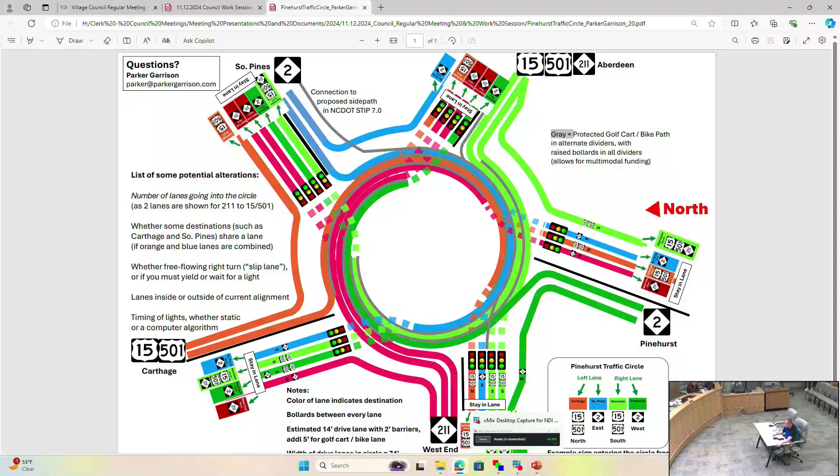Let's use the example of coming from Seven Lakes or West End, going to Aberdeen. The lanes will split off at some point before the circle. You'll have to stay in your lane throughout the entire circle, and there will be barriers in the appropriate place to enforce that. For simplicity, I didn't draw the gaps between the barriers when you're entering the circle, but there will be gaps in those places.

As I was talking with John, he even suggested maybe you could raise and lower the gaps for when the light turns green. That could be done as well, but that's not required.

Additionally, for multimodal access, there would be the opportunity to have a smaller lane to accommodate golf carts or bikes. I think the most common use would be connecting Route 2 to the opposite Route 2. I don't see many people trying to ride golf carts on the other three lanes into the circle, but having some connectivity there would be of use.

So let's say we're going from West End to Aberdeen. The lanes would ideally be painted to indicate clearly where you're going to your destination. So you would go to the light green lane to go to Aberdeen. You would have two options.

After talking with NCDOT at some of the other meetings, I added a second lane option illustrated here for the return trip from Aberdeen back to West End, seeing that that was not addressed by their current models. Traffic flow was backing up, particularly on both 15-501's entering the circle.

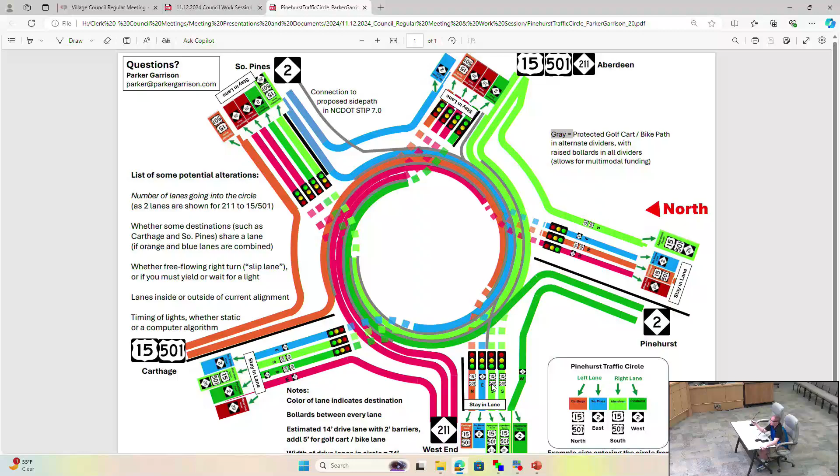Yes, the West End destination and the Aberdeen destination both have three lanes going to them. The merge for Aberdeen is shown here. The merge to West End was not shown on this map just due to space constraints. The lanes would split off at some point around Page Road or after that, so if you're coming from West End and entering the circle, it would become four lanes where there are now two, and only one of them actually goes in the circle anyways.

We talked a little bit yesterday about additional space that would be required to have these additional lanes. I think Parker was a little aggressive in some of the assumptions, but not necessarily, because you don't have to have absolutely all of these. The one thing that is true from the standpoint of a visitor: if you get in the wrong lane entering the traffic circle, you're not going to have an option to switch lanes.

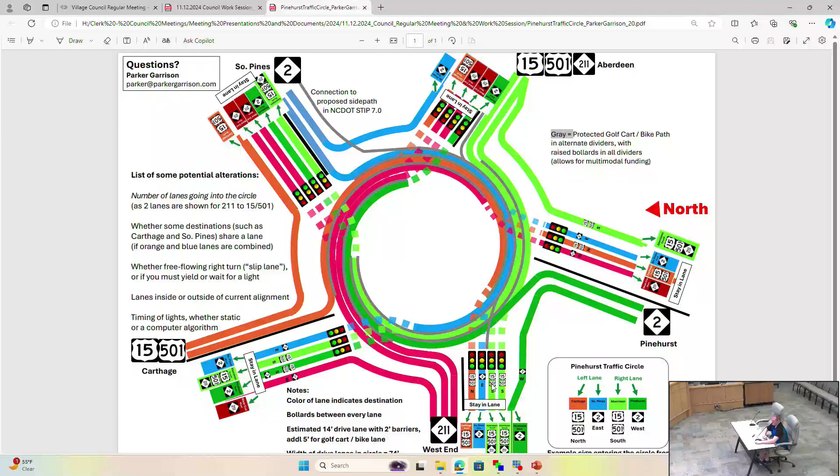So if you intended to go 15501 north but got in the lane for 15501 south, you're going to have to go south. It's basically like an interstate exit - we don't want people trying to switch lanes in a circle. By the way, that's not any different than if you pick the wrong exit lane on an interstate today. You may end up going south and having to go to the next exit and turn around. I think we've probably all done that at some point.

Yeah, and one of the other constraints I worked with was that we had to increase throughput through the circle beyond just right turns to more than one lane, because right now we're stuck not being able to go to two lanes in our current design without going to unsafe Jersey-style circles or confusing DC-style circles that have circles inside circles, controlled by two separate traffic lights, where you can't tell which light is for you. So, as you were mentioning, if we don't have the land to go to 4 lanes, maybe there's just one lane to 15501 south and one lane combining the orange and blue to 15501 north and 2 east. So you stay within the current footprint, but you still get 2 lanes going into the circle, and you double capacity through the circle.

Okay, two questions. How much of the circle are we taking away - do you have to carve out an acre of the 6.3 acres of trees, or what is it? What's your instinct tell you there?

My instinct says we'd be adding 2 to 3 lanes, each about 14 feet with 2-foot barriers, so we'd be adding about 60 to 70 feet. That probably won't take away from the circle at all on the side near Carthage - those 3 quadrants. It probably will take away from some trees on the side near Pinehurst Resort and Aberdeen. So we'd lose about 30 feet or so on that side.

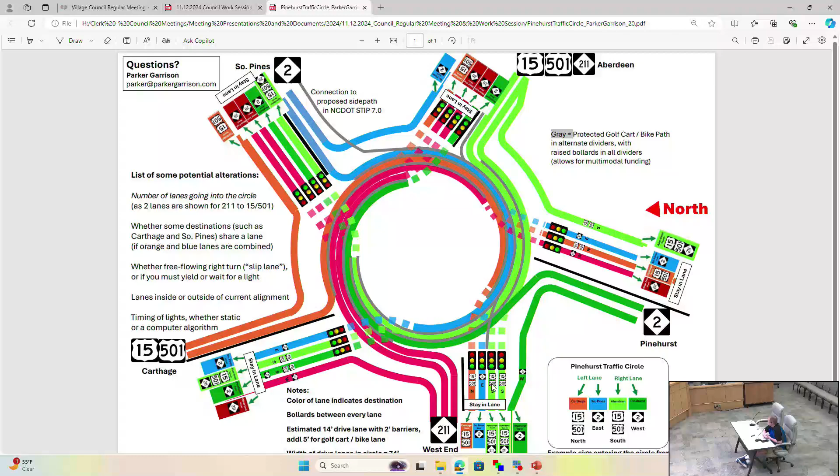Okay, so these traffic lights are independent for each lane, and they'd be sequenced somehow to allow certain directions into the circle while other lanes wait right next to them. Is that the idea? Yes, and you're already ahead of me.

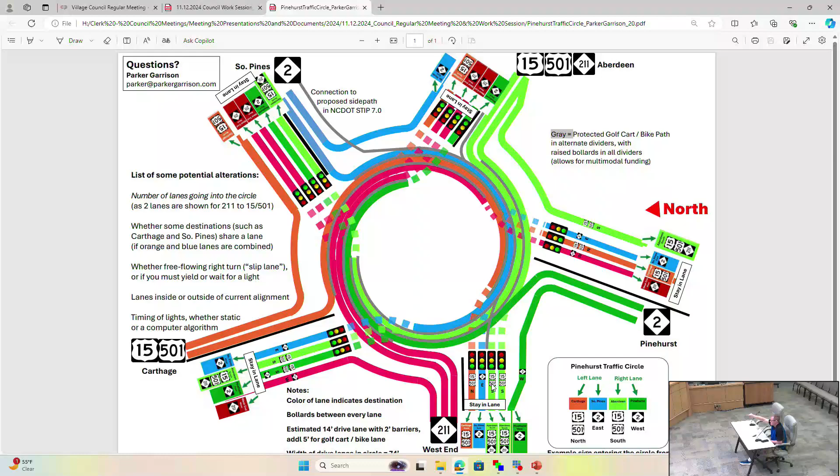No, good point. The simplest way to do it would be to have it sweep around in a counterclockwise direction, so there's no conflict with traffic already in the circle. So, for example, green from West End, green from Carthage, green from Southern Pines, green from Aberdeen, and then green from Pinehurst, and repeat the cycle.

But we can set up more complex arrangements. One I imagine will be particularly common, especially during evening rush, is: 15501 Aberdeen entrance to the circle allows all lanes except the dark green one to Pinehurst to be green. Southern Pines is red. Carthage allows traffic just to both West End and then to continue south on 15501 in the outer lane there. So you're able to get those 3 most heavily backed up directions of traffic to all move at the same time.

And let me say - go ahead. You have artificial intelligence recognizing how much traffic is coming in at certain times of day and adjusting the traffic via the lights, and also? Yes, there'd be the opportunity to dynamically adjust which lights are green and for how long. And in principle, it doesn't have to rotate - lights on opposite sides could change at the same time, depending.

Yes. Could you also describe for the other council members some of the conversations you've already had with people at DOT? Yes, so I was at the DOT's public engagement meetings in Pinehurst, and I communicated with their traffic engineer, Ruben, over email. He said he was going to take that concept and see if they could model it in their software, and I believe they would score it based off that. He said he hadn't seen any concept like this before, and he wanted to see how it performed in their models.

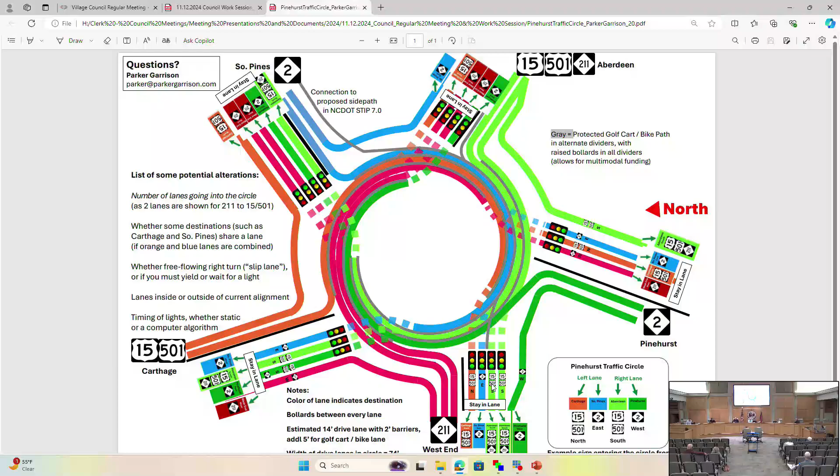So based on what I had spoken with Councilman Taylor about, we would not be using eminent domain on either the Pinehurst Resort section or on that section. But on each of these three sections, there would be the likelihood to acquire properties with all participants involved voluntarily. Two of the three, that's owned by Village of Pinehurst. That's owned by the medical clinic, and that one is likely this one here between Carthage and Southern Pines.

If we do not have the ability to buy any of those sectors of properties, there's always the opportunity to put the additional 2 or 3 lanes inside the circle. With how this area is probably going to be more lanes than the other, it would benefit us if we're able to purchase at least some of the property. If not, then we have to take away about 30 feet of trees on those sides, but it still maintains the 480-foot or so circle.

I think the setback where Pinehurst Trace is, there aren't any homes built right there, so it is at least conceivable, without having mapped it out, that it doesn't impose on PGA Boulevard or Dalrymple Road. No. Okay, thank you. So the commercial area along PNC Bank is a question mark.

I think the corner between Midland, 211 and Midland Road, I believe the lot closest to the circle is actually owned by the village, so there's at least room for a conversation there. But my guesstimate is that there are no homes that would be involved. There certainly would need to be some acquisition of land beyond possibly the existing right-of-way.

Can't move it. Shannon, can you provide any technical advice here? Too far away? Holding it upside down. Wait, it was upside down. Oh, that would do it. Oh, Peter, you had the mouse upside down? Thank you. Is that a keyboard? Sorry, guys. Bless you. Here goes. No, it's gone. I like the guy at the top who's pointed the wrong way. He's in trouble. I see the mouse, but it's not responding. It could be the mouse fan. There it is. Okay, you go. We're in business. Thank you, Doug.

Okay, buttons on the bottom here for, how do I advance it to the next slide? Down the lower left, there's a forward arrow button. I see it, right there. All right, finally, we get to go.

The objectives - I hate people who read for you, but these are our objectives. Find traffic circle improvements that improve flow and safety while maintaining the special nature of the circle and Midland Road. Maintain to the extent possible the circular character, trees, and streetscape of the Midland Road iconic entry to Pinehurst. Find solutions implementable in a reasonable time frame and less expensive than wholesale rebuild and destruction of the circle. Minimize the above-grade structures which are inconsistent with the historic environment, and minimize or require no additional property acquisition.

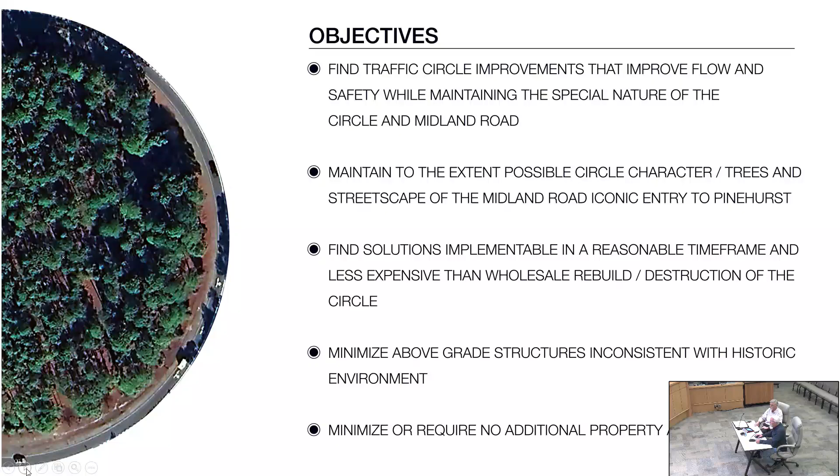I'd just like to add one thing. NCDOT kind of gave us a mandate that peak hour throughput should be 6,000 vehicles per hour. That's in 2050, that's what they're looking at, and that's based on their 80,000 vehicles estimate. Really, the 80,000 vehicles is not an issue as much as peak hour demand. So we have 1.5 hours during the day that really clogs everything up.

So we're going to show you today 3 schemes. The first one we're calling the true continuous flow, and we'll talk about that one first.

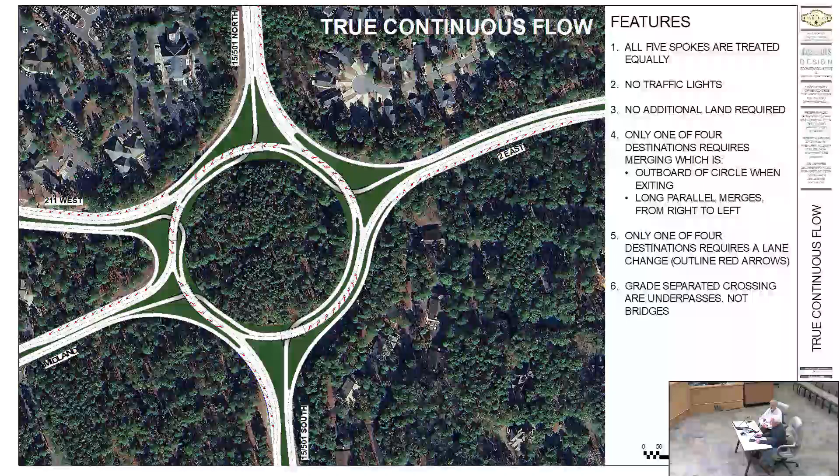This is a quick layout. This particular solution addresses all 5 spokes. They're all treated equally. There are no traffic lights and no additional land is required. Only one of 4 destinations requires merging, which is outboard of the circle when exiting, and it's a long parallel merge from right to left. Only one of 4 destinations requires a lane change, outlined in red arrows - I'll show you where those are. And there are some grade-separated crossings, but they are underpasses, not bridges.

So to show you how these work, here's a color-coded solution addressing just one of the spokes, keeping in mind that all 5 spokes are treated equally. In this example, we're coming north on 15-501. Pause for a minute - north is up. 211 west is on the left side, right here. 2 East is on the right side. 15-501 north and 15-501 south, with Midland going to the club on this quadrant here.

So first, let's be the yellow car, and we're on our way to 2 East. We would be in the right-hand lane. We would follow the yellow road until we get to about here, where we would have to merge to the left - a long parallel merge from right to left.

Questions? Next will be the blue car.

The blue car wants to go from 15501 south straight to 15501 north. We would start in the left-hand lane, travel north, and go down a ramp to be an underpass going under the traffic circle, while the traffic circle would be above you.

So would there be a height limitation on vehicles that could go under there? There would be, and what that is, is debatable. Peter will show you some schemes which have a shallower solution because his scheme has alternative solutions for trucks. In this case, this would have to accommodate trucks.

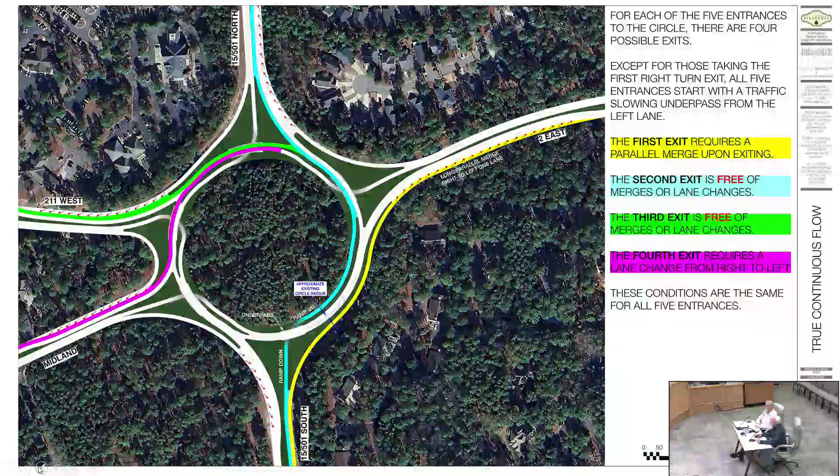15501 south — see on the next slide, Pat. So we've essentially answered your question for all 5 spokes. I'm not going to go through all of these, but this one is the one we just talked about from 15501 south. As you can guess, the other 4 work the same way from each of the 5 spokes. They're all treated equally.

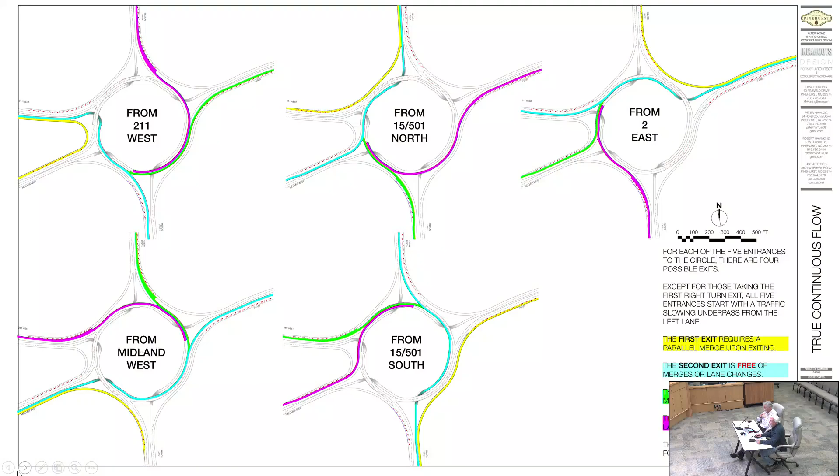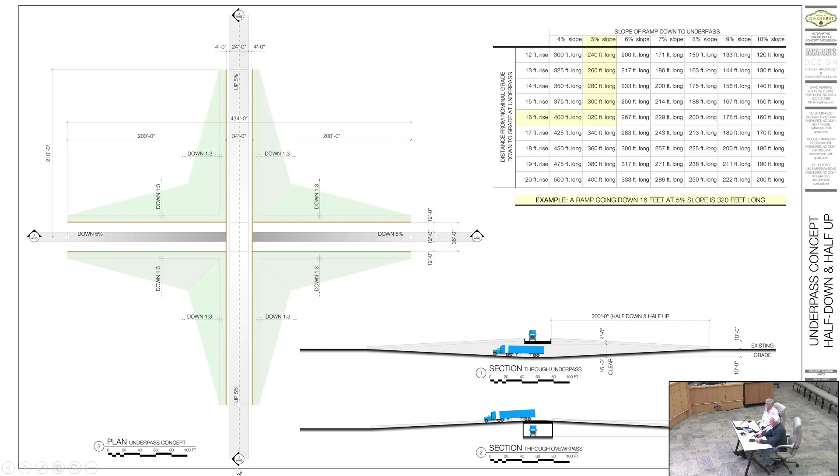There's a matrix up here for anyone who wants to get into the weeds, showing ramp slopes and ramp distances. In this case, there's the challenge of going under and then up to go over, so the distance from bridge to bridge becomes critical. This matrix addresses how steep the ramp must be. Keep in mind the underlying base grade of the circle is unknown, so we don't know how far up the upper part can be. By adjusting the distance between bridges and their vertical and horizontal locations, the ramp length and clearance can be affected.

Question: I understood the green car going on 15501 from south to north, but why is there now a gray part coming down from 15501 north into the circle? I didn't see that on the earlier slide. Clarifying: the gray underneath the green and purple are underpasses, for 15501 coming south into the traffic circle. Using the blue car as an example: coming from the north down the blue road, you go under right there. The blue car eventually goes around and could exit at 2, or change lanes to green or purple. But going straight from north to south on 15501, you come down blue, go around, hang a right, get on green, and continue south, with no lane changes or merges.

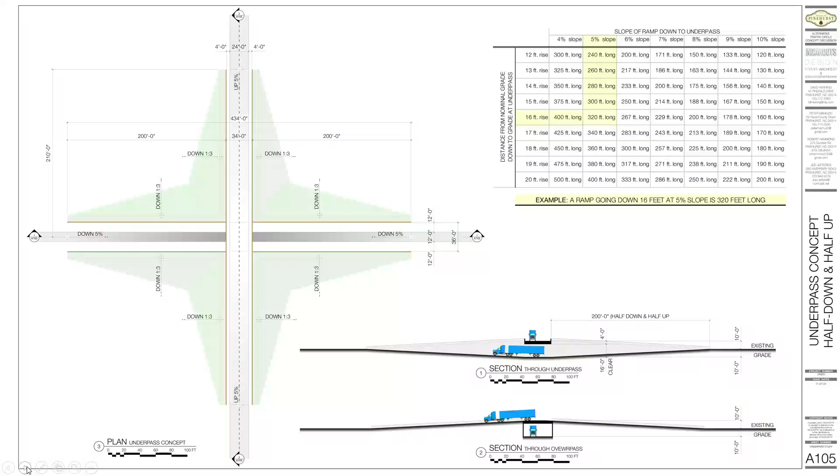The only limitation it has is it's only for cars. I've kind of arbitrarily decided on an 8-foot ceiling on this underpass with a 4-foot support structure to support the circle up above. That makes it 12 feet under the circle ground level.

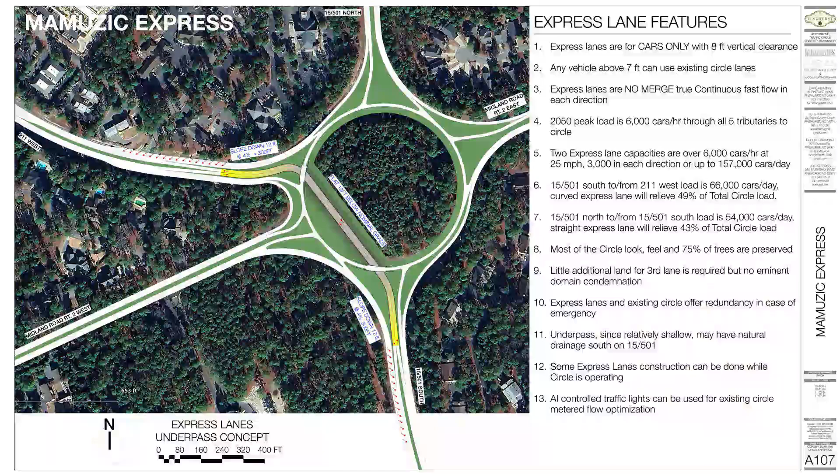Can I jump in real quick? If you recall, DOT, when they originally gave us two options 2.5 years ago, this is very similar to the second option. They actually had it as a flyover and not a tunnel underneath, but same basic concept of removing that leg and the largest amount of traffic out of the actual circle, and that would free up the circle to move more smoothly.

And you lose some trees without any question, but not a lot, because you can build this with retaining walls. You don't need the 3-to-1 slope, so you only need, call it 25 feet. Well, I'd figure 30 feet. With the 2 lanes with a 2-foot separation, it's 32 feet down at the bottom. With 15-degree up, it'll be 38 feet at the top. So out of a 600-foot circle, of which about 550 feet are trees...

I was going to mention the same thing Doug just commented on. This is very, very similar to the flyover concept, and I don't know specifically why they chose a flyover, but my guess would be that there's a deal with water. Whenever you start digging in this area and you get low, water management becomes an issue. The engineer is going to have to take a look at this and say, are we going to be at periods of time in which you're basically expected to drive through rivers here when you go down. When you go up, you don't have that issue.

One of the reasons why we kept it to an 8-foot clearance is not to go 20 feet deep. We're only going 12 feet deep, and if you go down 15/501 to the neighborhood down the street, and I shot it with my laser, which is not very accurate, but you can actually drain the circle, or drain the 8-foot depth, down the hill on 15/501. So water would not be as much of an issue. If we go 20 feet deep, you're right, we would have a river down there.

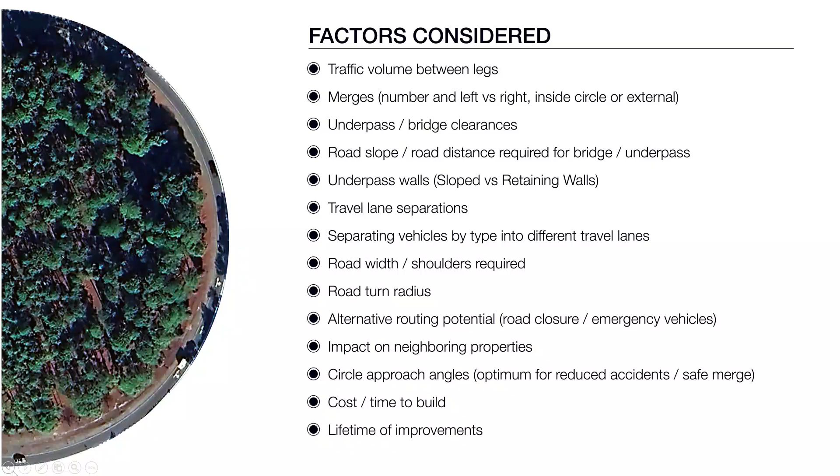So we have the true continuous flow, then we have the Mamuzic Express, or we could call it the fly under, and the straight through - I mean, straight through.

Here, I'll go to the front. And the last one is the straight through express.

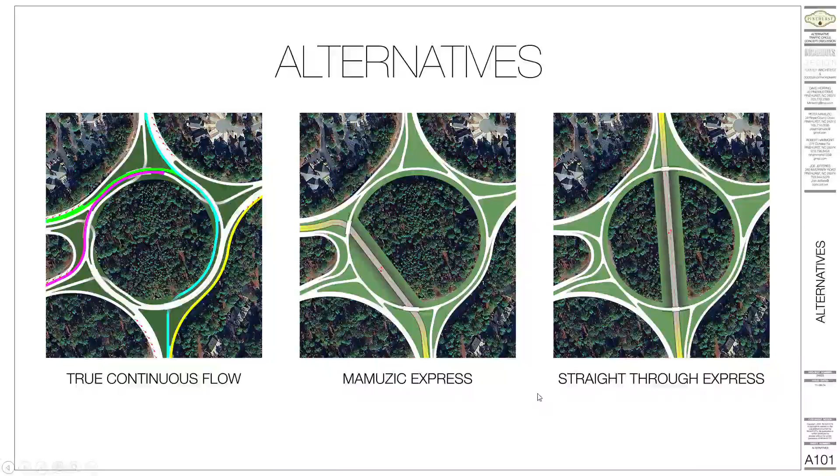Here are the three options again. I'm impressed, to say the least, that people took the time and made a serious proposal.

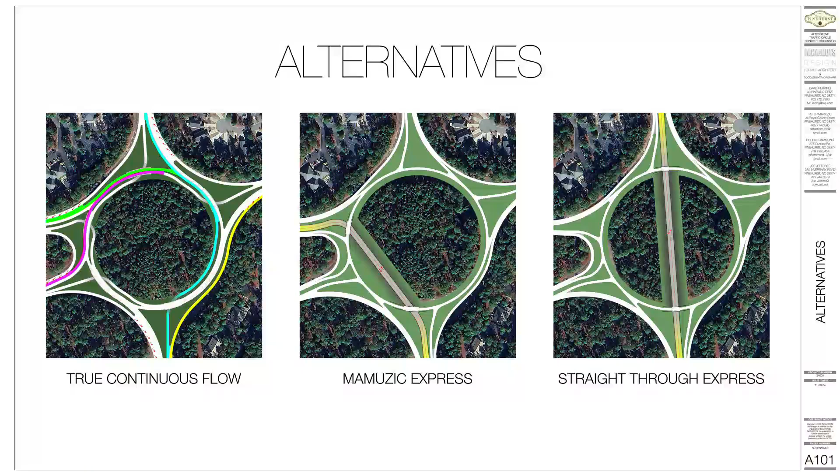I'd like to ask Parker, do you have any observations after watching these two geniuses at work?

Regarding option 2, the reason NCDOT studied a flyover only is that NCDOT does not allow new structures to be built with less than a 14-foot clearance, or 16-foot for interstate highways. So that would need a much longer approach and much further digging down if you were to do the second option you proposed.

NCDOT has also studied option 3 already. They found it was insufficient because of the traffic going on 211 to 15/501 south on that segment. They found we would need 2 tunnels essentially if we were to do those straight-through tunnels, and that we'd need longer approaches. Basically, 2 or 3 were not sufficient on their own. You'd have to study something that combined both.

The question I'd have back to them is, the straight express would remove some amount of cars from the circle, whatever that number is, which changes the traffic flow around the circle. It doesn't remove as many as the 211 fly under. So that's a bit of the trade-off: are we going to get to the perfect capacity number, or do we factor in something else? But that's a good point, thank you for that, Parker.

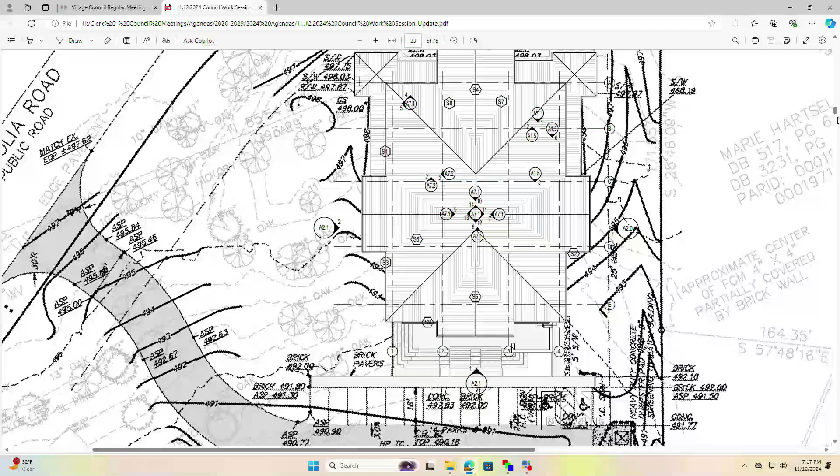Let's keep scrolling through this so we can see the rear view particularly. So there's not elevations included in these. We can go through it page by page, but—I don't need page by page, I just want to get a look at particularly the rear.

Is there a lift? I believe I saw a lift there when I looked at it online. Yeah, so yeah, there is a lift. I believe that's this right here. And how many steps are there?

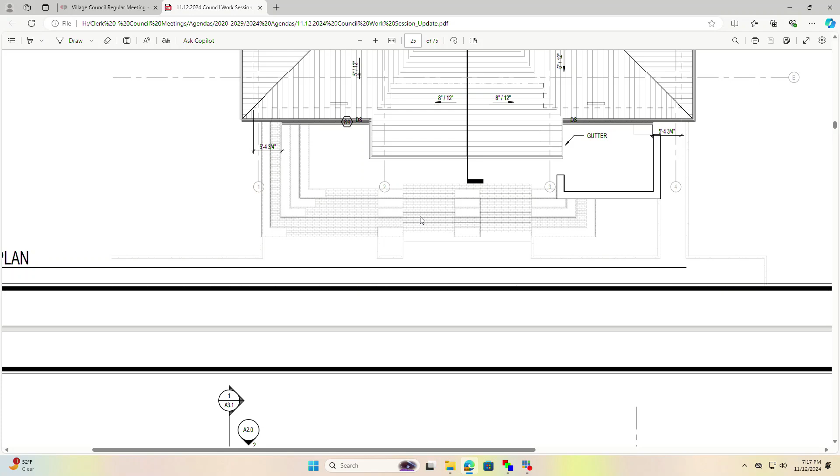Looks like 6. Or actually, these would be the steps. So looks more like 12. Probably double that. That's a lot of steps. That's a lot of steps for someone who parked their car.

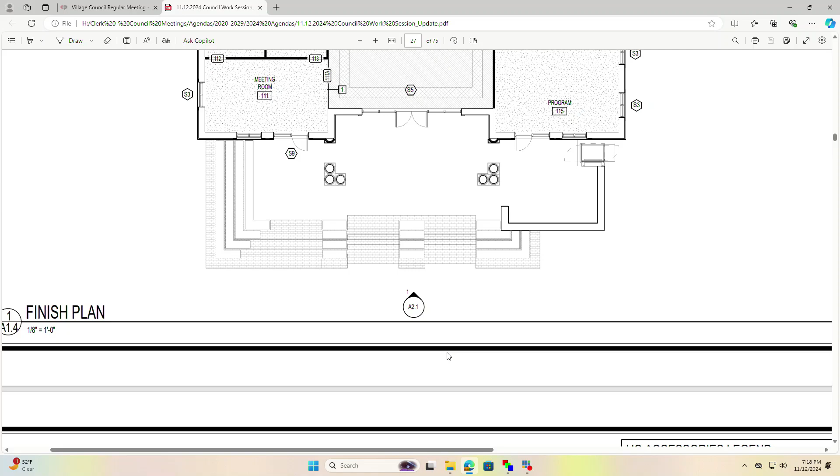I agree that we should not put this out and ask for responses in the month of December. Do we gain or lose anything by putting the information out, even if we don't ask for a response until January? We'll put it out as soon as we can, we just won't have the bids due until after the new year. Yes, please, put it out as soon as we can, and make it out there for a longer period of time.

No, that's inside. As I recall, the base of the back stairs, the elevator, or lift, whatever it's called, for handicap access, the base of that is the same grade as the handicap spots in the parking lot. Is that correct? Yeah, okay.

So there will be handicap access at the back door through the lift, but if there's a way to potentially put in a meandering trail along the side of the building so that a mom with a stroller could potentially go in the front door, I think that might be a nice touch if possible. And if it's not possible, then what are we leaving the disabled community with here? So they could either enter through the front door or using the lift in the back.

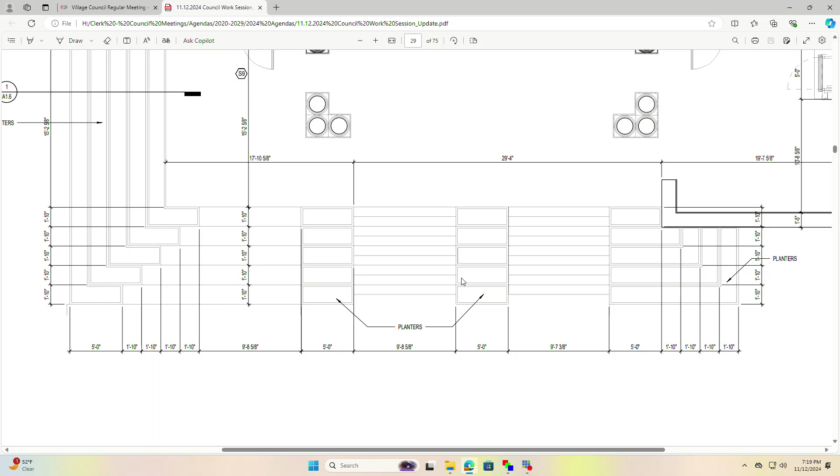Well, I'm missing something then. What's the difference then? Why can't they use the front door if they're going to use it anyway? Is there front door access? So currently the front door is only a drop-off, so there wouldn't be a place to park and enter through the front door.

So the drop-off, though, if you have a disabled individual, the driver's getting out of the car also. So it's not really a drop-off, but there's got to be a spot for the car to stop to help assist the person getting into the building. Okay, so we can also have handicap parking in front of the building, but based on our discussion in the past, we removed that handicap parking in the front.

Let me go back to the grading back here, the 12 steps. Is the reason they can't make it more accessible because they run out of land in the back? Or if they had another 15 yards of land, could they make it fewer steps and a ramp? That's what I don't understand about what they're making.

The reason why is that coming off the road, it's relatively flat, but once you get 100 or so feet in, it starts to go down, and the parking lot is at a lower level than the actual building.

Well, is there a drawing of the rear? I'm trying to understand, is there shrubbery or whatever's back there that indicates the end of the library lot? Is there such a drawing? There's not. The ones included here were only the building layout, the construction drawings for the library.

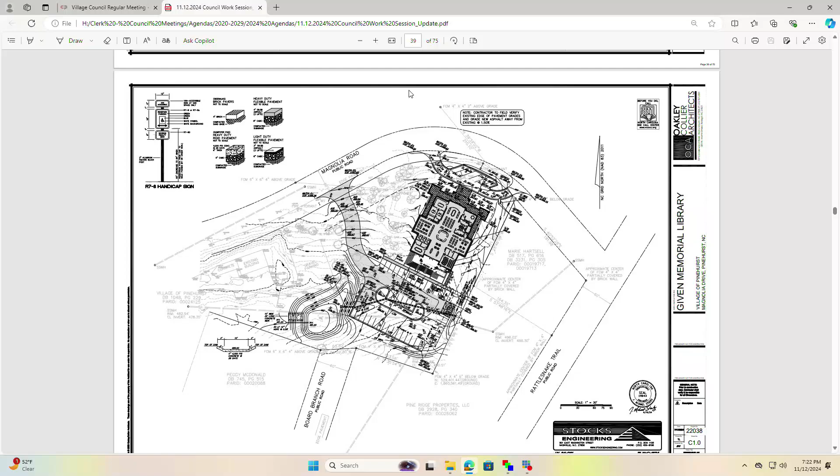It's much better served through effectively an elevator, which they're calling a lift. So you pull in and you elevate up through there mechanically, and you go from there.

If council wanted to address handicap access to the building as much as possible, we could do a potential trail along the side here and enter up at the porch or the front entrance, or at this drop-off, which won't include the angled parking, but we could do a parallel handicap spot there if we wanted to.

I think it's a mistake to have vehicles parked in front of a building that we spent all this time trying to make look nice. Yeah, I mean, that would be the only other option to make it easily accessible.

Is there enough space coming up what from this perspective is the left side of the building, all the way from the lot to the front? Yeah, that's what I asked them. I believe there would be. I mean, that's pretty far.

And even if it's not the specific 12-to-1 ratio, it would hopefully be long enough that anyone, a mom with a stroller, would be able to do it even without that. It could be 10-to-1 and it'd still be okay.

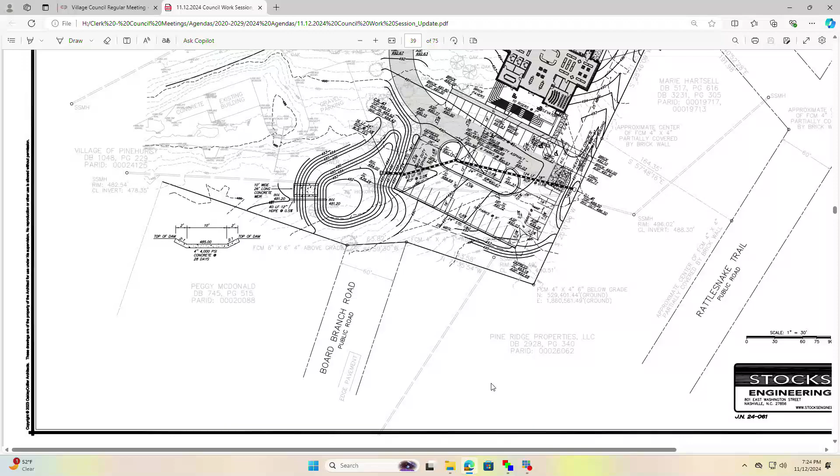Do we own the land to the right of this? Do we own the land behind there? No, there's a home. So we are boxed into these property lines. Yep, there's a home back there, it's my recollection. But what's the difference between the parking there and the next property line? Is that 50 feet, or can you tell?

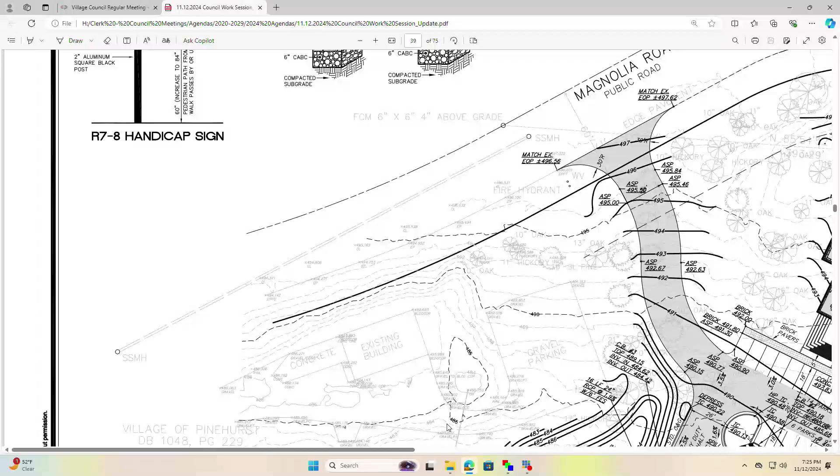So, right, we've got all these parking spots back here. Yeah, shift it a little over to the other side now. Go ahead up a little, there we go. So that's where it stops, the parking right there, and we've got this amount of space.

I'm assuming that's something like 10 or 15 feet. I don't know what the setback would be, but this parking space is 18 feet deep, so it's probably about 15 from the parking, which I think is our setback, so I don't think we can get any closer. It just looks deeper in the back than the 18 feet. Oh, here, yes, a little bit. That's where I'm getting at.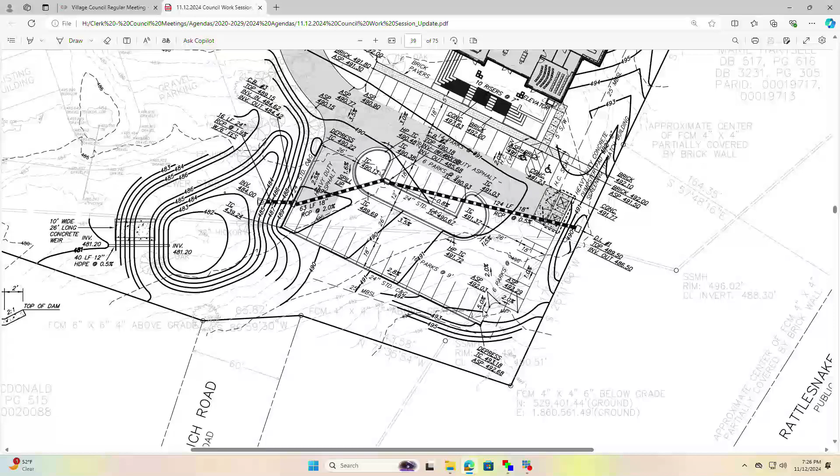Are the concentric circles in the lower area some sort of drainage, or is that just topography? That would be storm drainage, like a retention.

Does anyone recall the number of parking spots we're going to have? I know we went through this. 46, 48, something like that.

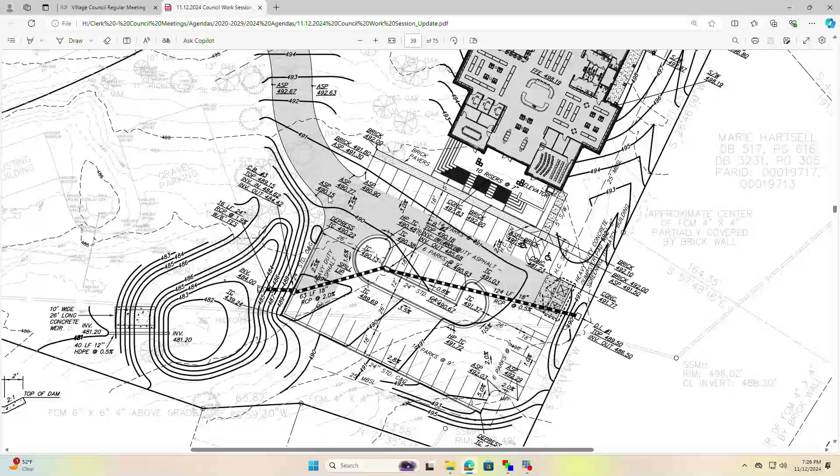Go ahead, drop down a little more so we could see the front again. Okay, so now in front, is that 1, 2, are those 5 parking spots there?

So based on council feedback, we're removing these parking spaces, and we would widen this drop-off zone just to have kind of a through lane and a drop-off lane. So I drive in and drop off somebody, and then since we're removing those spots...

Can I turn around, or do I not have to turn around, can I go straight out to Magnolia? Is that an exit there? Yeah, you'd be able to leave here. So I can come in, drop off, and then go out that way? Yeah, this is a one-way drive, okay?

And the closest parking for a disabled individual is where? The actual parking, yeah, right here. And so this is where they would park, and then here's the sidewalk to the lift right here.

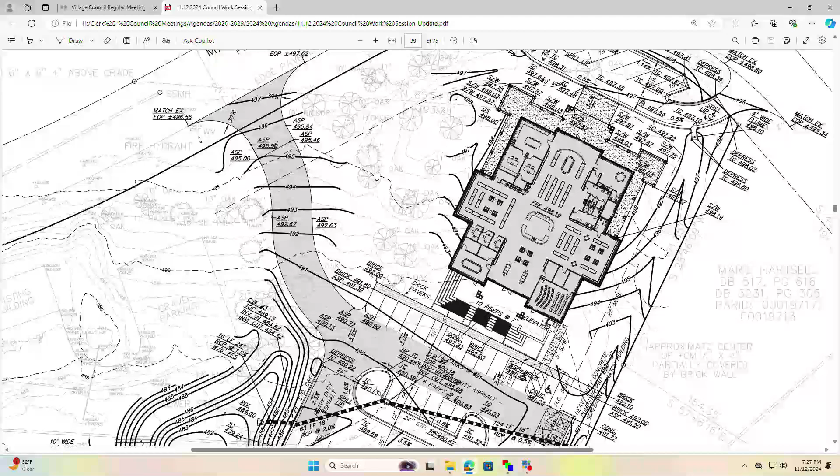Unless we have some on-street parking, but that won't be assessed until later on, correct? On-street parking though is usually not recommended for disabled. Yeah, and particularly on the curve here, I don't think on-street would work. Okay.

Somewhere around here they have the brick pavers. We'd include a meandering trail to get up here to the front. Right now, without that trail, it's just grass and trees. I don't know what the slope would be, but I gave them that feedback today. That would give the option for somebody to take the lift, or if it's a sunny day, they could come up with a stroller or in a wheelchair.

Are these numbers designed to be elevations, 492, 493? Yeah, elevation lines. So it looks like 492 at the back, and at the front it's close to 500, 498, something like that, so it's only 6 or 7 feet up that side. You'd have enough room to get up that way.

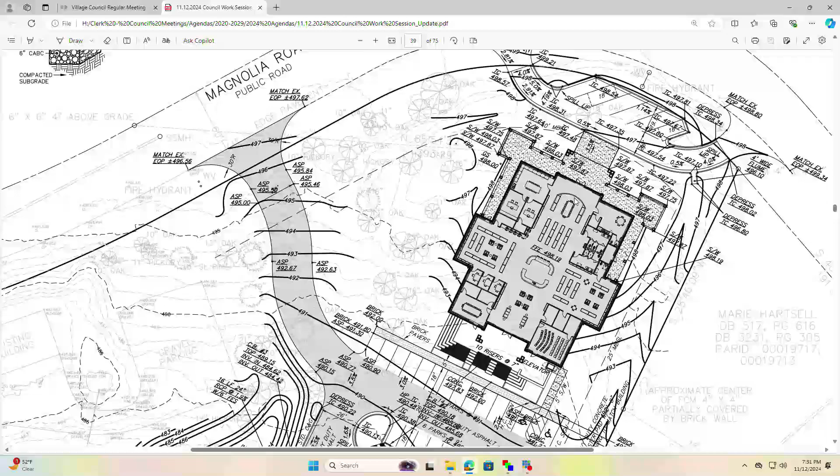So we'll move forward with the path, and we'll have a bid package prepared shortly, and if there's no other feedback, we'll move forward with the building as is. I don't have any other questions at this point. So you'll go out whenever it's practical, give it ample time to get responses, and that's when we'll see a final price tag.

Again, we're adding a path, subtracting the diagonal parking, and making room for some form of drop-off in the front, however that is orchestrated. They were waiting for their civil engineer to play that out, but that is the plan. Who's the technical review committee? It's an internal committee, so it's the fire chief, the public service director, and the planning director.

Okay, do you have the information you need, Doug? Yeah, I'm good. Anybody have any other input for Doug or questions? Okay.